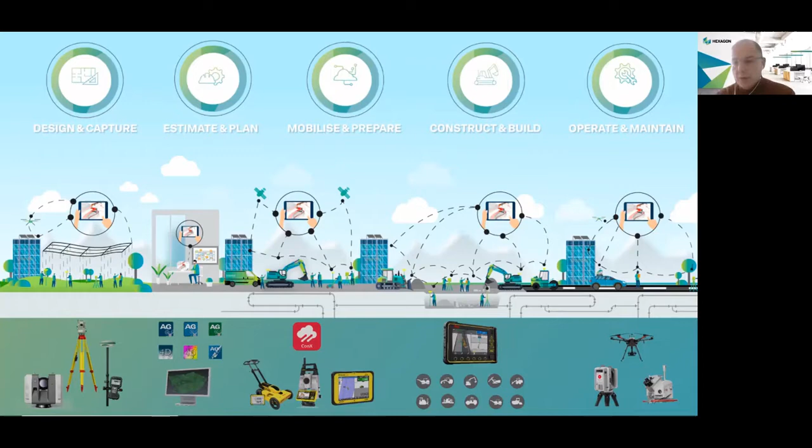We then move into the connected site. That means making all of the elements on this site geospatially aware, including the machines, the people, the material. We then get into the actual construction. I think most of our focus will be on that today. And then obviously in the last phase, somebody will need to take care of the roads, the bridges, and the beautiful infrastructure that has been built over generations.

So with that I want to finish here. It gives you a quick overview of our portfolio and the various pieces that need to come together to make geospatial reality a reality. You saw a few of this equipment operating here in the video, but from a technology point of view, one we found particularly challenging is the excavator, because the extremities of an excavator compared to its base are more mobile than on many other pieces of equipment.

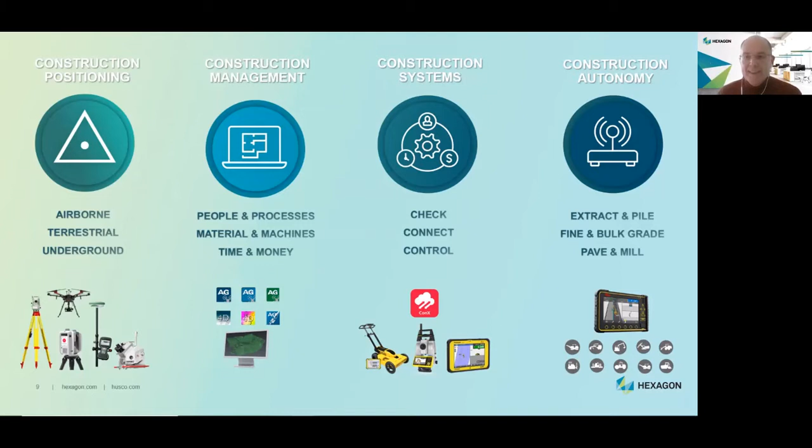So geolocating a bucket towards the center of the machine, towards the actual material we want to move, is one thing, but then we actually need to get that movement done. And that requires hydraulics, that requires strength, that requires expertise in making sure that the right piece moves to the right location at the right precision and the right time.

And so with that, I actually want to hand it over to our experts in this area, my friends from Husco, and give us a little bit of insight in terms of, okay, it's all nice, Hoppy, knowing where everything is, but how do we move it? And Simon, I pass it over to you. I think it's going to be a very nice part of this presentation.

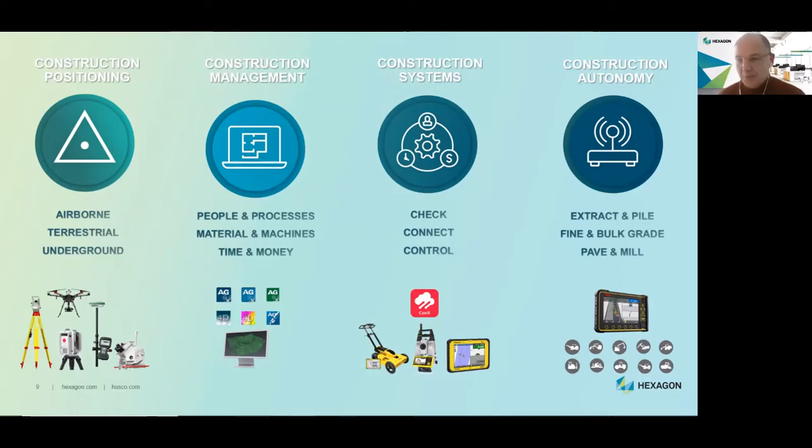Thank you. Perfect. Thank you very much, Hoppy. Yeah, we like being called experts. I'm not sure if it's true of me, but certainly is of Ben, but no, that's great.

And thank you for the excellent overview of the digital landscape. And that's a landscape that is available today, which is really great to see the progression that's going on around us. The benefits of digital operation on certain machines have actually been recognized for some time.

We've been using electro-hydraulic control systems for the blade control of bulldozers or motor graders for some time now, and very quickly we were able to achieve a lot better productivity through increasing precision, so less cuts required, or by actually increasing the speed, because it's less operator doing fine adjustments, making some of those operations semi-autonomous. So we knew bringing in digital aspects and communicating with the digital landscape can bring huge benefits.

But then we came to the excavator, and as Hoppy just alluded to, even from a surveying and machine control, a large environment point of view, the excavator is difficult. Well, for us trying to control that, it's even more difficult. Excavators are really interesting because since their conception they have been tuned year after year to make a skilled operator more productive. And so Husco really needed to develop what was represented by that box I have in the middle of the graphic here.

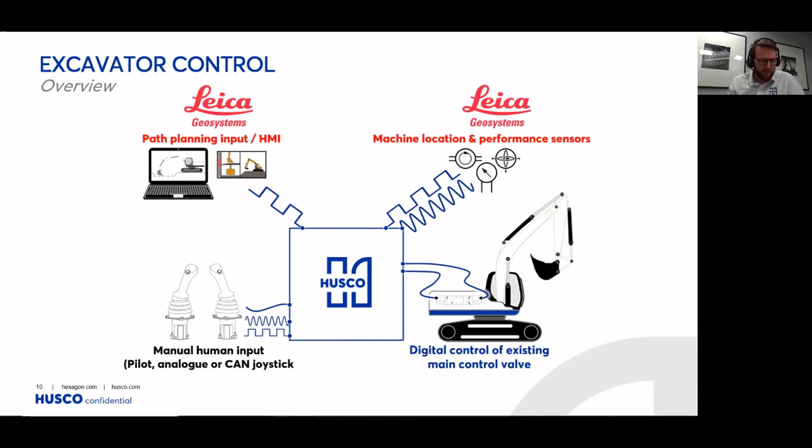But control of the excavator itself is really difficult, and we tried to kind of represent this. So if you imagine drawing a perfect circle with your hand, just a pen on a paper, or even worse, doing it on a wall with your arm stretched out, it's really complicated, and there's a lot of things going on in your head to control the various different muscles that are moving the pen or the paintbrush. Let's now translate that to an excavator where you have two hands doing all the control.

This is our medium skilled operator. It's actually myself trying to draw a circle with an excavator, and it's really difficult. There's so much going on around the machine, the variability in the different geometry and the speeds, and you need really skilled operators, and as Hoppy mentioned, that's something we don't have as many of now.

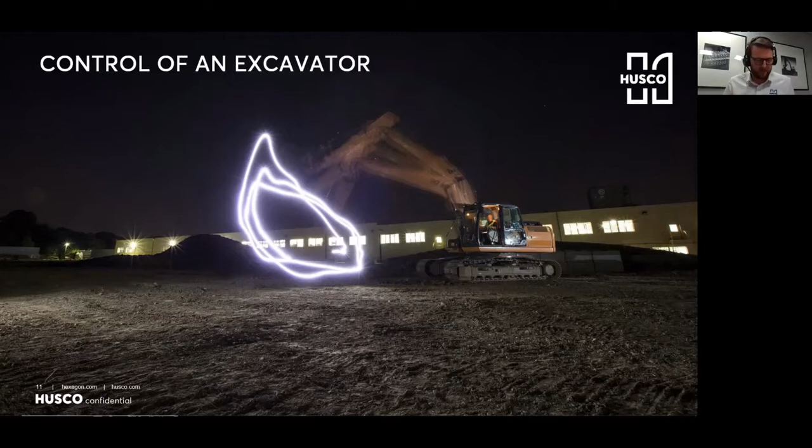So Husco's challenge was to take an existing excavator and really dig deeper into the challenges. So we took this machine, a standard rental machine in the USA, to come up with a solution to answer some of these questions and create that hydraulic API. The solution had to be safe, first and foremost, when it comes to any form of automation or overriding of a system. It had to be easy to install, although we are hydraulics guys and could have completely ripped out the whole system and put a new one in, that isn't going to be feasible in the market.

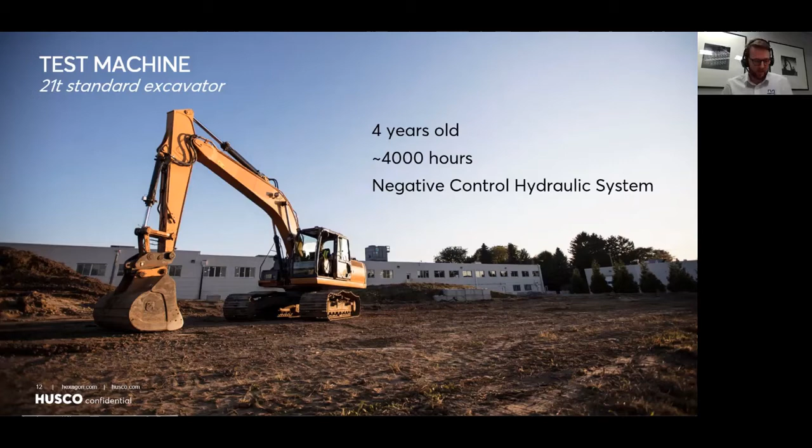But most importantly, it had to be able to provide precise digital control of any excavator. You don't want to have to tune one of these excavators for a week each time. It's unfeasible in the market. So Ben, who led the team who did this work, is going to walk through a few of those technical challenges that we faced. He's going to summarize the system that we developed, and he's also going to show you some of the results that we got off this machine. So Ben, with that, I'll hand it over to you.

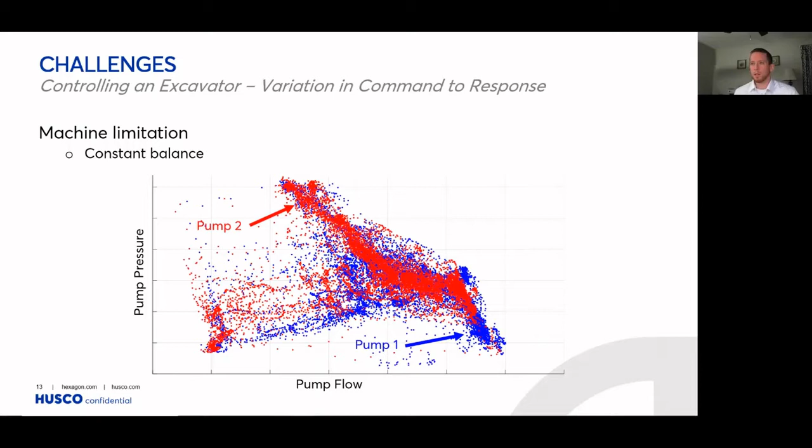Thanks, Simon. So talking about the challenges of excavators, right here what we have is real data from a machine. For those of you that maybe don't know, hydraulics are extremely power dense. A typical 20-ton excavator has 2 pumps, one shown in the red and one shown in the blue. This is real grading and digging data, and it's got quite a trend. If you pick it out by eye, there's a lot of points right on an edge, and you might wonder why there are these edges in this data, or why there is a lot of data in one certain spot.

And what it comes down to is the hydraulics have a lot more power than what the engine can give, and this is because at some points you need a lot of pressure. You need a lot of force on the system to dig through some heavy dirt, or maybe you hit a rock. And so that's that top curve. That's where you're on the pressure limit of the system. Other times you're in free air. You're just trying to get the dirt out, spoil it to the right, or just get rid of it. And that's where you're on the flow limit of the system.

You don't need much force. You just need to move quickly to get something out of the way. And then where you spend a lot of time while you're grading or digging is where you're on the power limit, where you're actually risking killing the engine because you're taking so much power out of the engine, and the hydraulics have more power to give, but you're actually limited because of that power. And so here you're on the power limit.

And so this is a piecewise function. It's multiple constraints. All the while, the operator is commanding full sticks to try and make sure that they're going as fast as possible. So during a dig, an operator is actually cognizing in their mind how to traverse through these pressure, power, and flow limits while they're disassociated, while they're further away from what the actual machine would be doing in single function, or if they're hitting a rock, or if they're in free air.

And so all the while, real time, an operator, while they're digging, is meandering through these curves, trying to make sure that the machine is doing what it needs to be doing, all while trying to be productive and efficient. And that's something that takes years, if not decades, of expertise to really understand and really get that muscle memory. And so that way the end effector, that bucket tip, is an extension of an expert operator's mind.

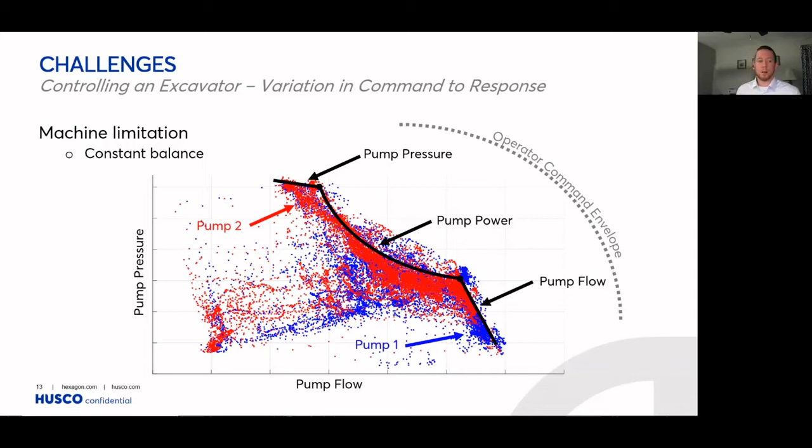And so this is one of the things that you have to think about while you're trying to control an excavator or many other hydraulic machines: how to traverse through these limits successfully and not burn too much power, or not end up in an uncontrollable region because of it.

All the while, I mentioned at the beginning that you have 2 pumps. If anybody's seen an excavator, you don't have 2 functions. And so over the last many decades, maybe almost even a century, the excavator has been tuned by the likes of Husco and others and OEMs in order to make it an extension of that operator. And they've done that with two pumps.

Now, some excavators may have up to 12 functions, or maybe even more, but generally just to do a simple grade, no tilt bucket, no tilt rotator, no aux flow, just a simple grade, you can see here in this animation, there's 3 functions that are actually moving. So if you've got 3 functions, but 2 pumps, how do you think that you would want to move those functions? And that's one of the things that the hydraulic main control valve has been tuned on for these many decades: how to make 2 power sources work for 3, 4, 5, sometimes 7 functions in order to get some coordinated movement. And because of that, everything interacts.

It's a pressure flow based system in the hydraulics, and each function interacts. So if the bucket hits a rock, it's going to add pressure to the arm to try and dig through it, which is then maybe going to push flow to the boom, and you'll lift up. Again, the operator real time is doing a closed loop control in their brain to adjust for all of these minor nuances, all these minor changes in the system, because they know what's going to happen. This all has to be programmed into a controller in order to make a grade possible, so that way it is flat, accurate, repeatable, and not jumpy all over the place.

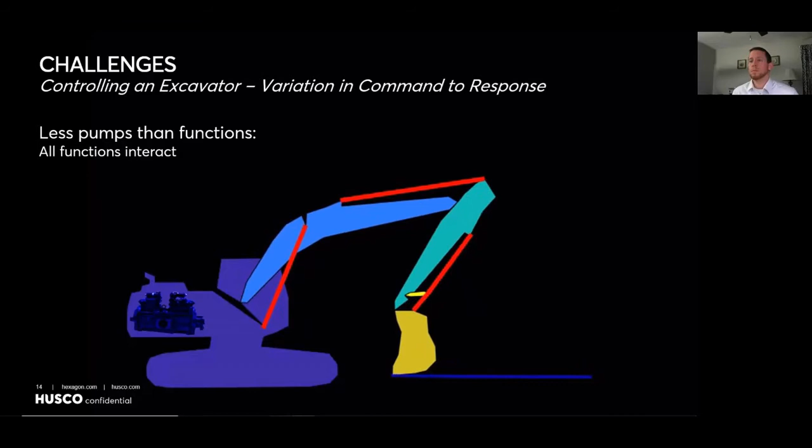So if we look at our washing machine, every time you go through a spin cycle, it kind of goes slowly, and then you get this thump, thump, thump, and then it speeds through that and goes faster and then gets quiet again. And so that thump, thump, thump is where the natural frequency of the system is. And that's where you're most excitable.

So if you think about the spin cycle, where do you dry the clothes the fastest? That's where it's at the fastest speed, when it's out past the natural frequency. Do you still dry the clothes below the natural frequency? Yes, but it's not as effective. It's not as productive. It's not as efficient. Do you want to sit at the natural frequency of the system where you're just constantly going thump, thump, thump? Going at the natural frequency, you're going to end up breaking things because you're exciting the system.

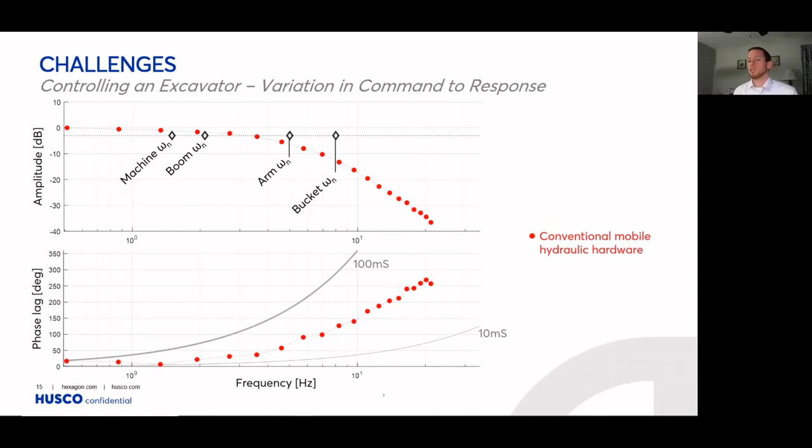And this is why a lot of times when you start trying to control machines, you end up with an unstable machine, because as soon as you touch the boom, it starts shaking the whole machine. And that's generally because of how hydraulics have been tuned and the natural frequency of the hydraulics. So I'll touch on this a little bit later, but I'd like to explain then what we did to try and improve the performance, improve the natural frequency, to alleviate some of these problems and some of the other challenges that we discussed in the previous slides.

So the solution we developed: we're a hydraulics company. We make a lot of main control valves, a lot of EH valves, but we also have over the last several decades developed many control algorithms to showcase that EH hydraulic valves, electro-hydraulic valves, can and do operate just as good, if not better, than pilot systems. It's not the simplest, it's not the quickest, it takes a lot of know-how to do that. But we've been able to showcase to a lot of our customers that this is possible.

And when we came and started working with Leica a little bit, we found out that having our know-how on a controller that's just accessible allows us to focus on the hydraulics, and allows Leica to really focus on the machine structure, the machine kinematics, the sensor chain. And so each of us took on our expertise and really made sure that they worked as best possible, so that way we had the best overall system in the end.

So Leica just trusted us to work on the hydraulics and make sure that the hydraulics did what they're supposed to do. And so we ended up calling it this hydraulic API, because it was a programmer's interface for Leica to just get the hydraulics to work. They didn't have to worry about latency, response.

Other things, because it was all taken into control in our controller. And so Leica could worry about the 3D mapping of the site, and Exacto would just work. And so we call this Exacto.

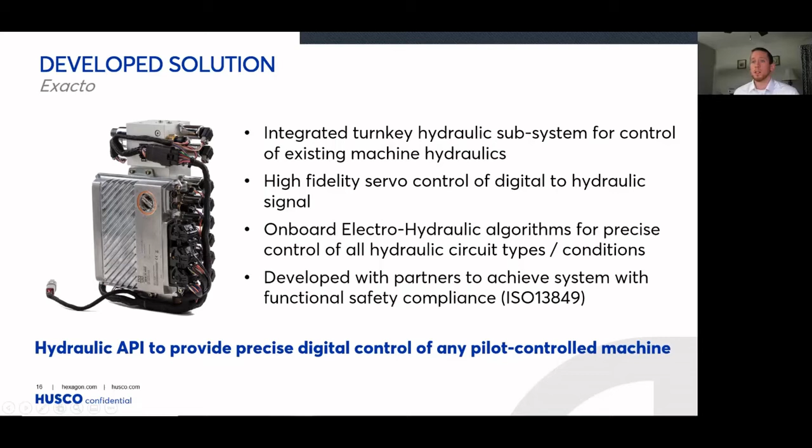And then, as safety is important, we developed with the partners a functional safety routine to make sure that we can comply to all the European directives, to make sure that not only is this an integrated and simple system to make the hydraulics work, it was also safe in accordance with what we and Leica deemed necessary. And so we're just about finishing up that documentation here before the end of the year, and we'll be able to claim this as a functionally safe system, to be for sale in the market through Leica.

And so now coming back to our data here, with the Exacto system, we said that we want to make sure that we're able to control at the absolute performance of the system. And so with Exacto, we're able to push out the natural frequency of the hydraulic system out past 10 hertz. So 10 times a second, we can switch direction on the hydraulics, which you might say is a lot for an excavator. But when you're talking about moving the bucket or moving the arm quickly or precisely, making those minute changes to be ultimately accurate on the grade, you need that performance. You need a higher performing control system than what your plant is doing.

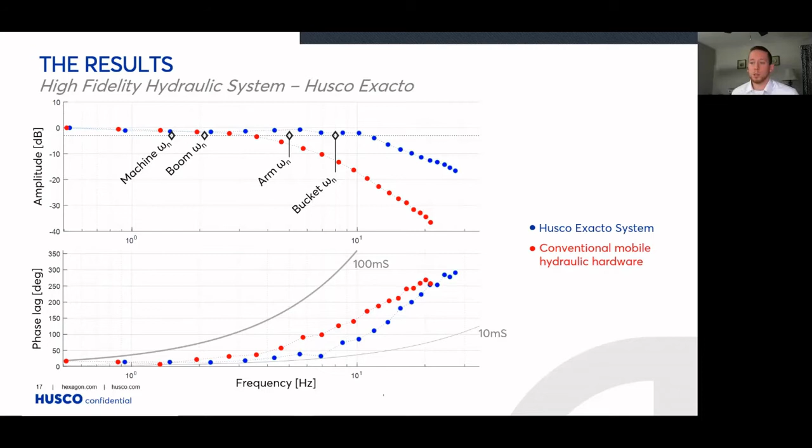So we wanted to make sure that we had the hydraulics that had a faster reaction time, not only in latency, but also in a reduction of amplitude that was out past the bucket natural frequency. And we were able to achieve that. And the next couple videos that we'll show showcase, when you have a precise, fast, repeatable hydraulic system, what is possible when you join that with robotic machines such as an excavator and building information management tools, the 3D management of existing work sites. It really does turn an existing machine into a CNC machine you'd see on a machining floor.

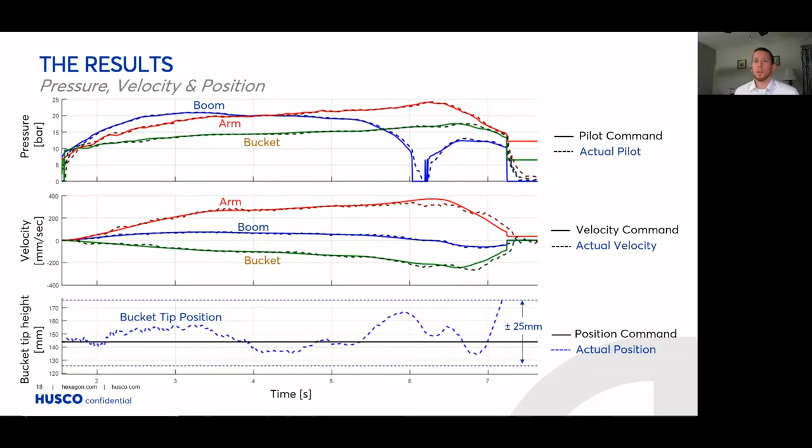And so as you can see here, we've got a full grade that starts at about 2 seconds to 7 seconds, a full grade that we've done in 5 seconds on this proof of concept machine, all within plus or minus 25 millimeters of the requested grade. And that's only possible when you've got a highly reactive, precise hydraulic system capable of making those minute adjustments as you go through the earth and come to unintended rocks or soft spots or hard spots that don't do exactly what you were hoping when you go through that grade. And so these are really the results that showcase what you can do with a really high performing, repeatable hydraulic system.

Perfect. Thank you, Ben. Well, so in summary, the system really did meet our initial targets, the safety and the convenience of fitting this. Certainly in our lab in the US, but I know from hearing from the Leica guys, fitting this complete system in under half a day is very easy, which is really good. And on the performance side, we really were able to achieve pretty much 90% of the available velocity of that machine. Since then, a bit more tuning has gone on, and we're actually able to exceed that.

But that's really quite impressive, considering all those challenges and all those different variables that you have seen, and Ben has spoke. We were really quite pleased with how that's gone. Since the initial work, we've increased the amount of functions that we can control and port through the controller as well to make it expandable, because that's pretty important.

But I hear you all wondering, and Ben alluded to, what about that circle that Simon mentioned? Well, we removed me from the cabin. That was probably the first important thing we did. We used the path planning that we'd used for the flat grade, and we plugged that into the Exacto system, and here was the result. So a lot better than, unfortunately, I could ever achieve.

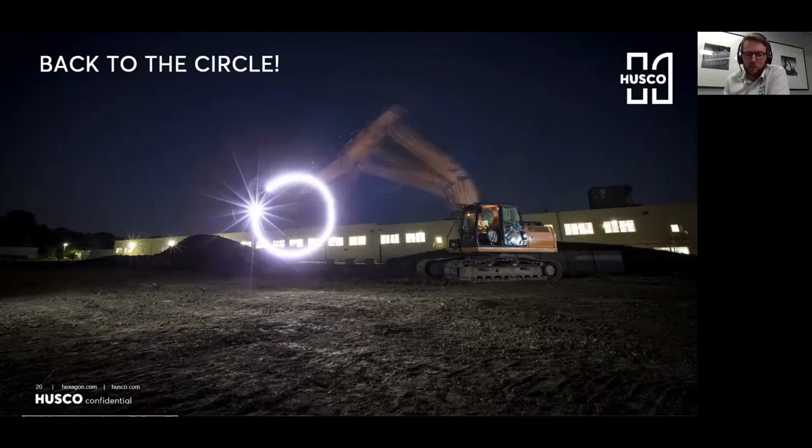But the headline here wasn't really about the performance, although we were very proud of what we did. It was the fact that it then opened up Husco, this hydraulic control valve manufacturer, the ability to partner with companies such as Leica and integrate into their infrastructure and all of their environments that we have seen. And this working in partnership that we have mentioned today really shows when you look at the components.

And this unit has been fit to over 30 different machines in the last 12 months. And the real strength of this partnership is that not one of those various different machines, different makes and models, has had to have different hydraulic tuning. So the work that Ben has done on all of that consistency and how we've worked with Leica on the communication means that you don't have to put it on and then tune it for 4, 5, 8 hours to get it correct. It's always working like any correct API to anything that's demanded by the user. So that's been a really important part, and that's why these partnerships have been so important.

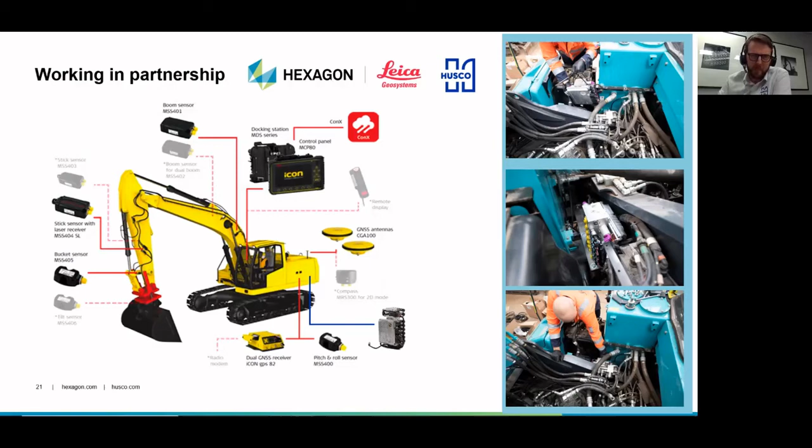Getting this towards a semi-auto functionality, excuse me, that was the most important part for us and the aim of both companies. And early in October, this system was actually released to the market and has made it out onto several machines. And the release really sparked an important step, not only just for both companies, but it was a really good step forward in productivity and bridging the gap to challenges as highlighted by Hopi with construction today.

But also it showed that in-depth technical requirement that both companies have had to overcome together, which Ben mentioned. So that's made it really great for me personally, being part of the project with both companies and using both strengths. But before the Q&A session, I've got one more quick video, which is actually from the field, digging this very complex shape, just to show you both companies and both systems working together.

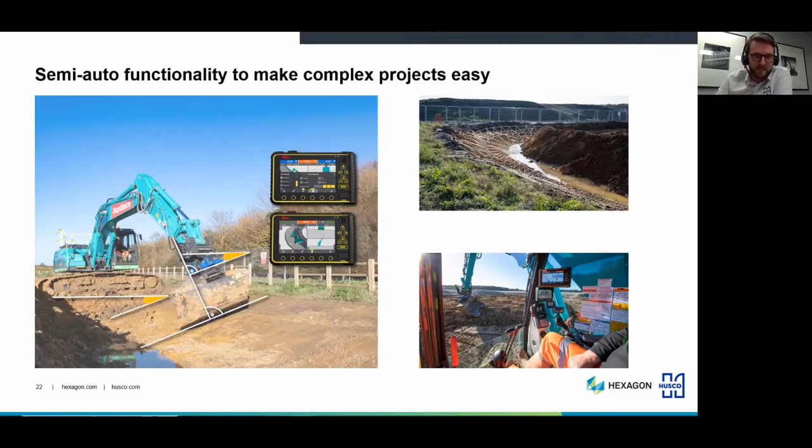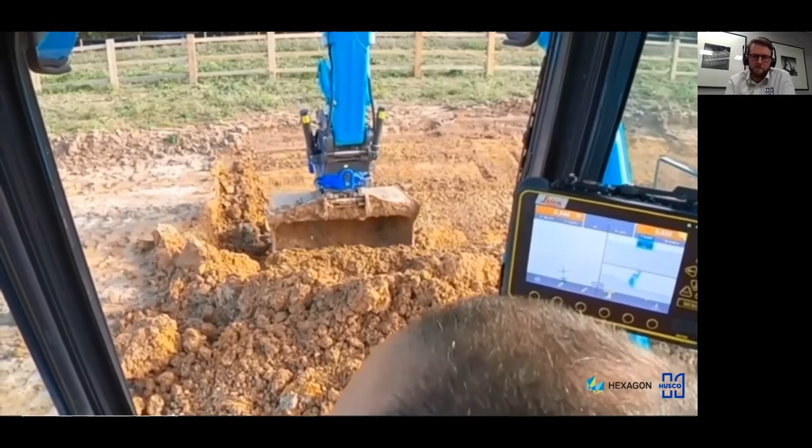Today I'm sat in a Kobelco SK210 that's recently been installed with our semi-automatic system. So it's got the standard 3D machine control from Leica that's now on the MC1 platform, but on top of that it's now got a valve fitted that allows the operator to have hydraulic control of the excavator through the machine control system. Okay, so let me just talk a little bit about the functionality of the system, talk you through some of the components that we've got on here.

The first thing we've got is the same panel that we'd have on a normal 3D excavator system. So you have your cut fills for either side of your bucket. You've got your design here for, in this case, a swale pond.

On top of that, we now have the option to automate some of the functions of the machine, so we can take control of the boom, of the bucket, of the tilt, and also the rotation, because on this particular machine we've got an SMP tilt rotator as well. So we have hydraulic control of all those components, and what that means for the operator is the only thing he has to do is pull on this lever and the machine will automatically grade to the design.

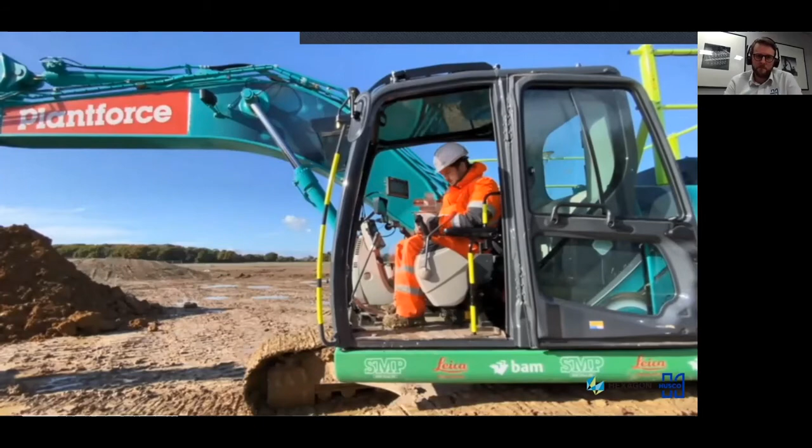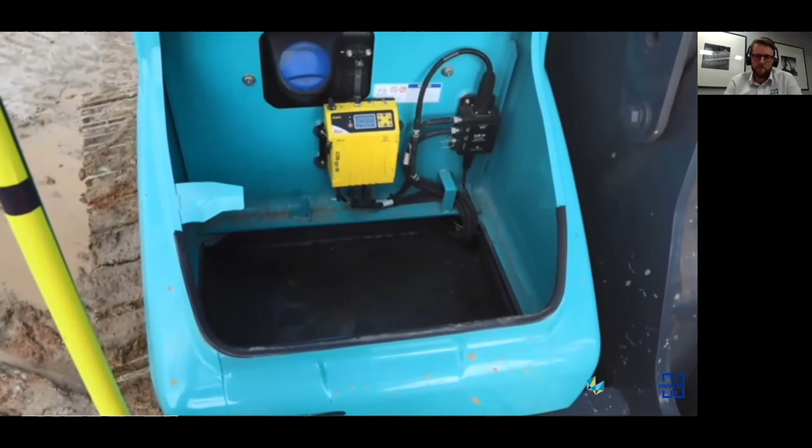So that's what we've got on the system and some of the bits there for the operator. I'm now going to show you some of the components elsewhere on the machine. So the first thing you'll notice is up here on the handrail we've got our GPS antennas, so they're picking up the GPS signals throughout the day. That signal is then sent to the ICG82, which is placed just here, and that does all the calculations involved with the GPS, including any RTK corrections, so that we get our sort of 20-30 mil accuracy there.

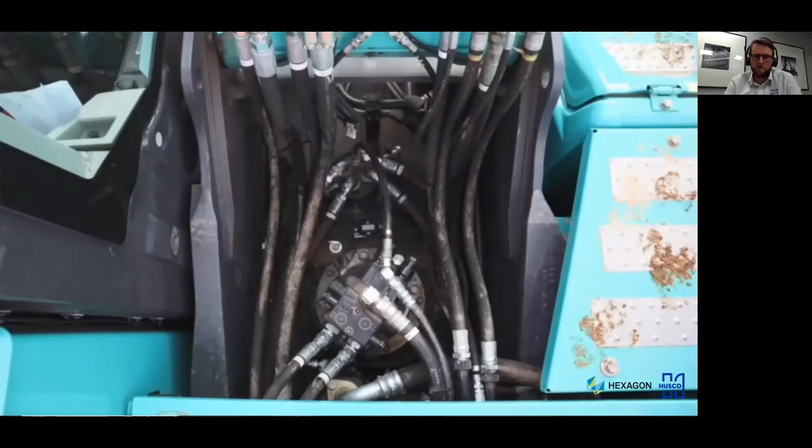And you'll also notice we'll have sensors placed on different parts, so each moving part essentially of the excavator will need a sensor to read the angle. So we've got our boom sensor up there. We have got a body sensor mounted inside the slew ring as well. You can see just up here we have a sensor on the dipper arm. There'll also be a sensor inside the hitch for the bucket angle.

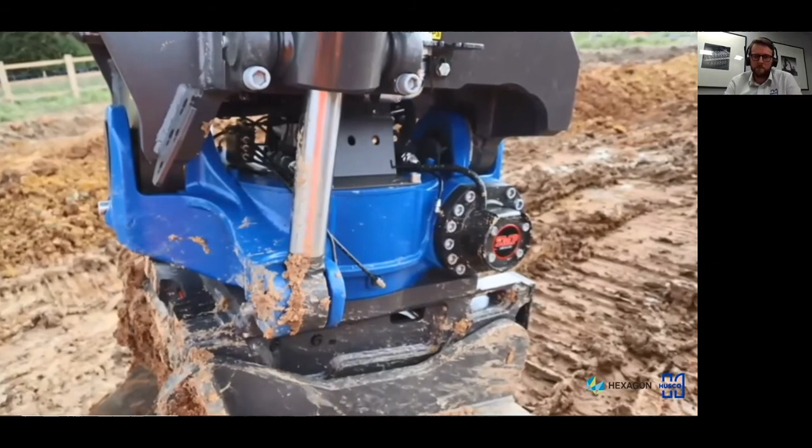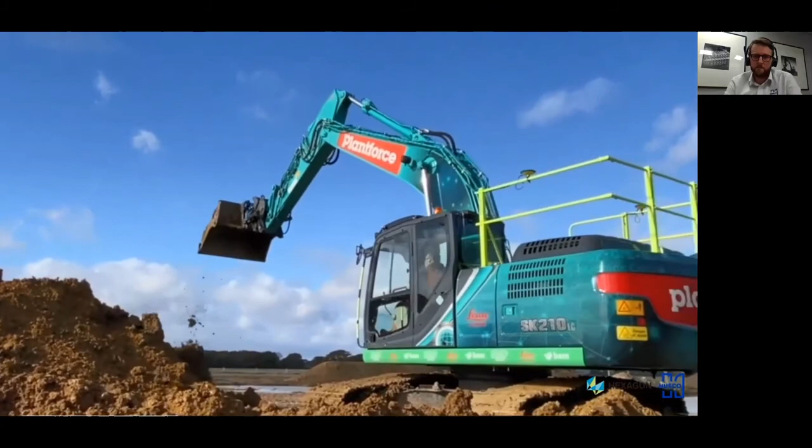And then for this SMP tilt rotator you also need an extra sensor for the tilt, which is placed just inside the unit there. The way the tilt rotator works is for the rotation we get a value from the SMP system by interfacing directly with them, and that's how we get the accurate results for any movement of the machine essentially.

So that's it for me. We've spent the past couple of weeks getting our first semi-automated excavator here on site, and it's now ready to dig away at this swale pond.